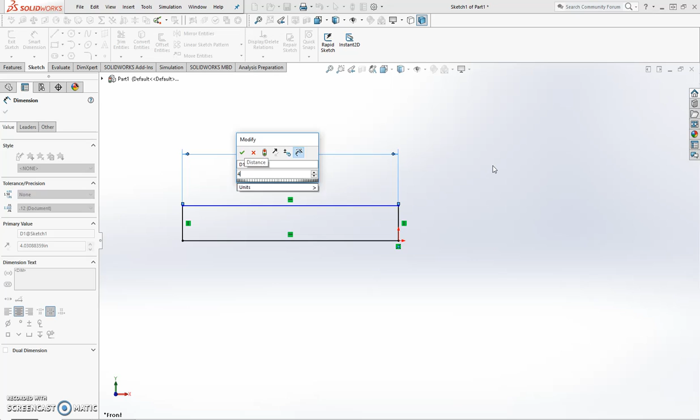Smart Dimension tool is our favorite tool to make sure everything is accurate. I'm going to Smart Dimension the width of mine to be 4 inches, and I'm going to have it only about a quarter inch tall. Very tiny. Now this is still, like I said, a tutorial, so even though this might not be an accurate hinge for something like a door...

It may be something to work on more of an airplane or something that is very large in construction.

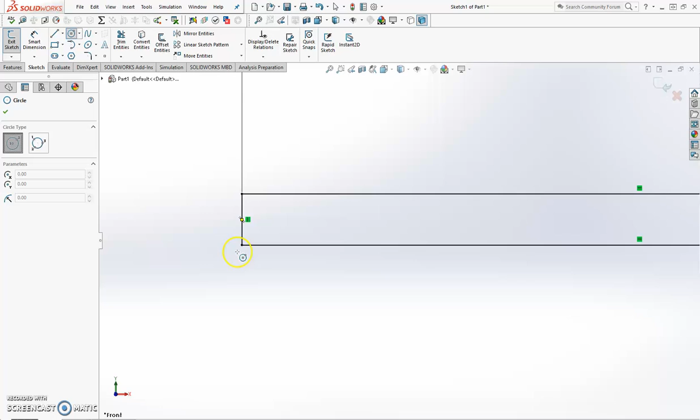Now what we need here is the rings that our hinges are going to be able to swivel on. So I want to take my circle tool to one of these intersections, and I'm going to zoom in to make it very easy to see here, and I'm going to click and bring that all the way up. Now because we know the distance of the thickness of our hinge is going to be a quarter inch, we know the radius of this is going to be a quarter inch, and the diameter will be half an inch. That's good information to know when we cut this out down the road.

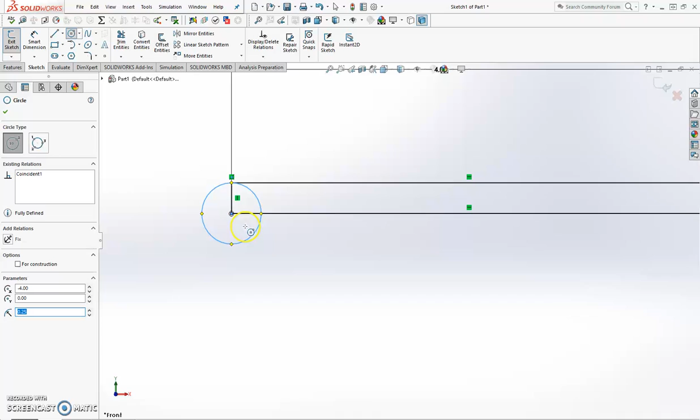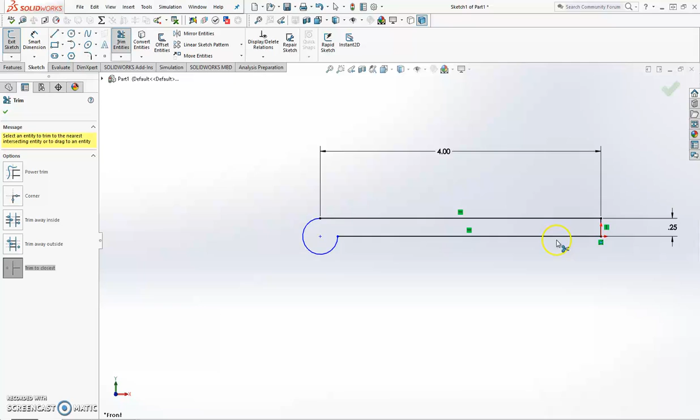Now we want this to be all one giant shape, so I'm going to go ahead and grab my trim tool. I'm going to trim to the closest - 99% of the time you'll find this being used. I'm going to trim out the parts I don't need, leaving this nice single long surface to use. I'm done with my trim tool, so I'll green check mark it.

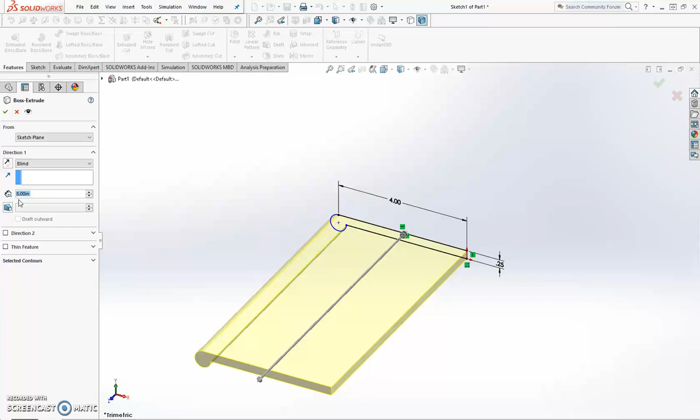Then I'm going to go ahead and extrude this and give it 3 dimensions. So I'm going to go into Features and do an Extrude Boss Base. We can pull the arrow as far as we need to give it the right distance, or we can come over here and type in the distance we want. For this demonstration, I'm going to make mine 8 inches long, and then I'm going to green check mark. Now we have a nice, beautiful hinge that has all the things we need for it for now.

We need a pin to eventually go through this, so we might as well make our cut through it right now. We will do an extrude cut on the surface.

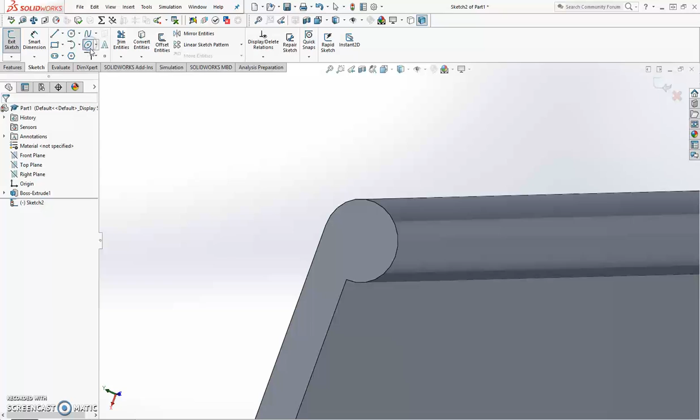I'm going to grab my circle tool, and then I'm going to create a circle here. Now it can be very difficult to find the center, and a lot of students will find this very difficult to figure out where to put your circle. But if you take your cursor and kind of hug it along this edge, you'll get these yellow points showing very certain sections of the circle. More importantly, you get this black dot in the center of the circle show up, and this is the center of it. So I'm going to make my circle from that point.

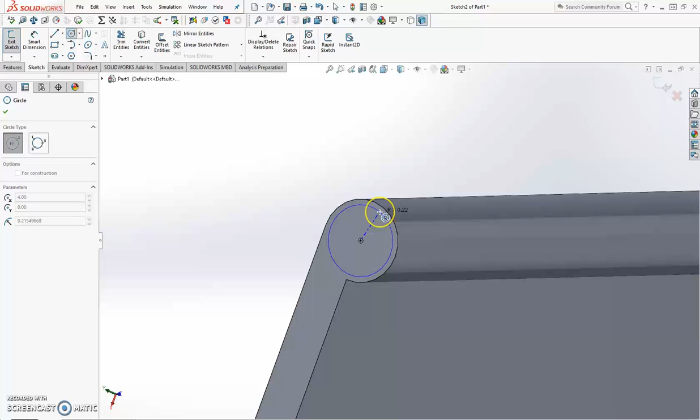Now looking back, the diameter of this should be - the radius is 0.25, and the diameter is 0.5. So I'm going to make my circle here just short of that, so I have just a little bit of room to work with. I think I'm going to Smart Dimension it out to be exactly 0.4.

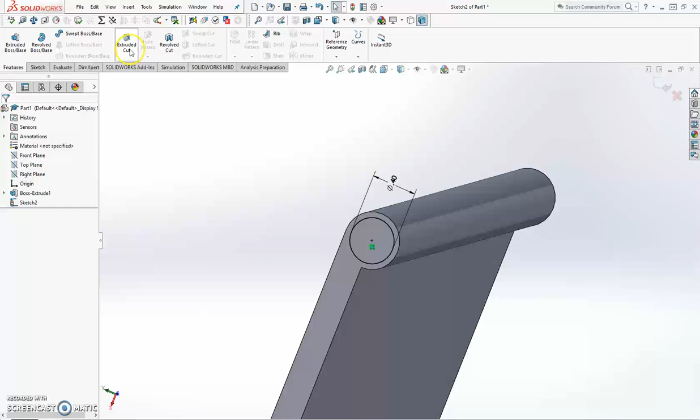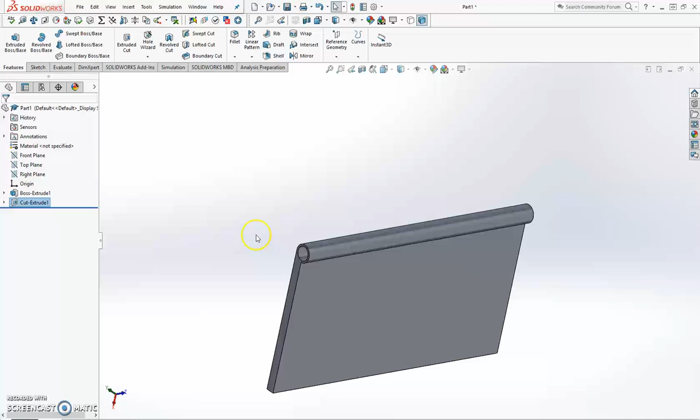When I have that exact 0.4, I'm ready to cut this through, all the way through. So I'll grab my features, extrude cut this time, and pull this all the way through. The length of my hinge was 8, so I'll make this number 8. This circle can be pulled all the way out, and it can go very far, and you can be excessive with it if you want. It doesn't matter because it is an extrude cut. I'll check mark that, and now I'll have a nice opening here.

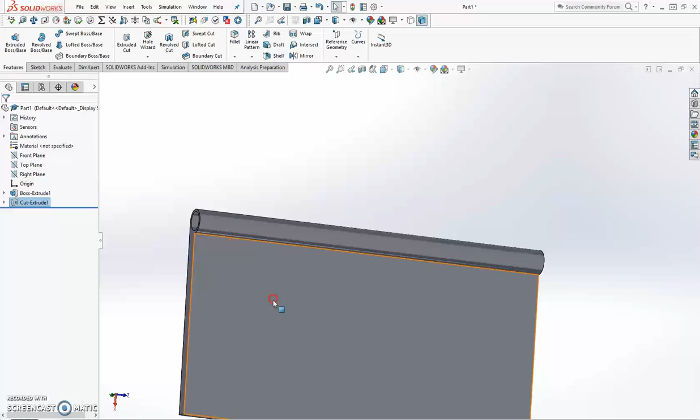Now, a hinge needs to have several different sections cut out of this top area. This is used so that we can have multiple sections hook up to each other. We are going to cut these out by making an extrude cut using one of the planes from the front side, so I'm going to go ahead and create a sketch on this front surface.

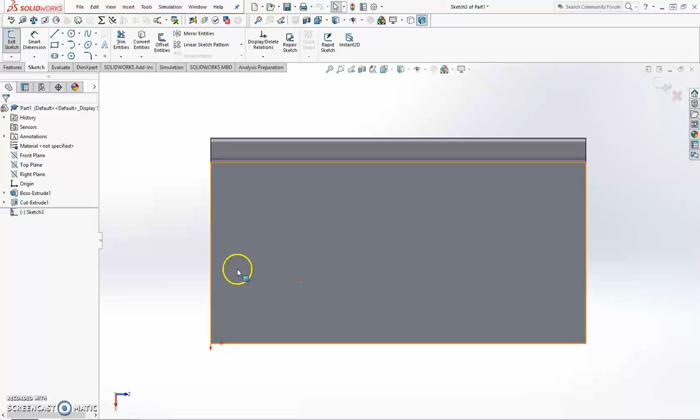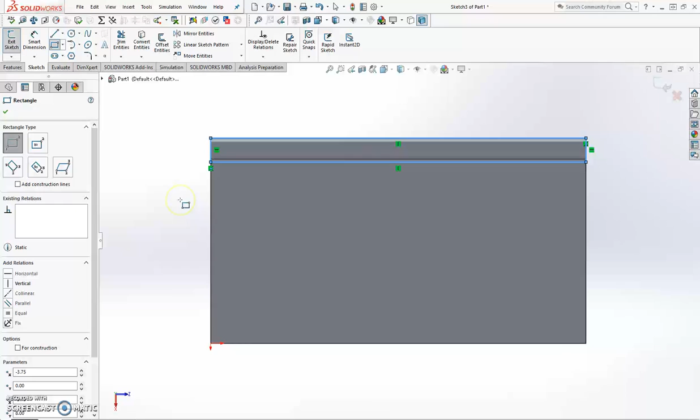I might even press spacebar so I can get my orbiting dice and look at this plane specifically, the side with the curve facing forward towards me. What I want to do is take either my rectangle tool or a line tool, and create this rectangle that pretty much goes the distance of our circle. If I smart dimension this out, it's going to be the same size as my original, the same thickness I made the circle, as well as the length of my actual hinge. Now, if I look at this from the side, we are going right down the middle, right through my actual circle, because I built it on this plane.

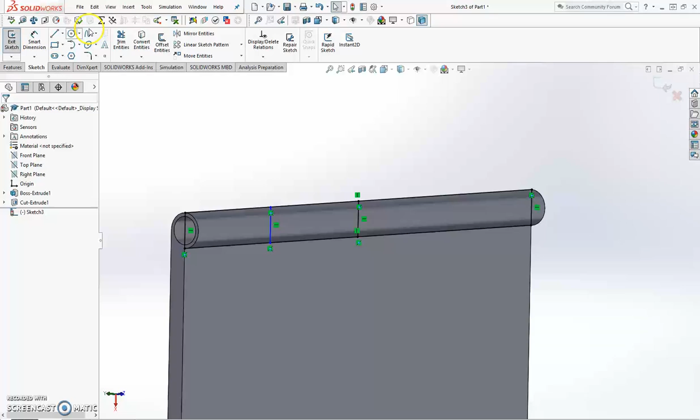Now what I need to do is cut this into equal sections. So I'll take my line tool, and first divide it perfectly in half. I'm going to make a few more divisions, and have 4 sections of this.

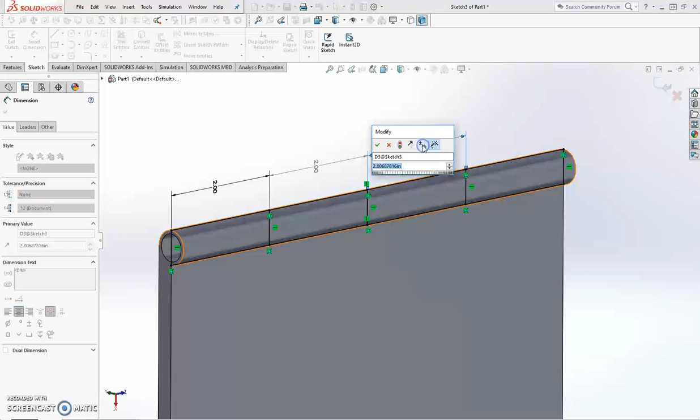Now what I need to definitely do is start to dimension this out so they're all equal. I know my distance is a whopping 8 inches long, so we're going to make the distance between these vertical lines about 2 inches. If I click this line, instead of smart dimension out its thickness, I'll take my cursor and click its neighbor, and what they'll do is make a smart dimension between those 2 sections. I keep that pattern going, force it to be 2, and 1 more, and everything goes yellow because SolidWorks is telling us, hey, I know that was already supposed to be 2. So you just gotta say, okay, you're right, SolidWorks, you're so smart.

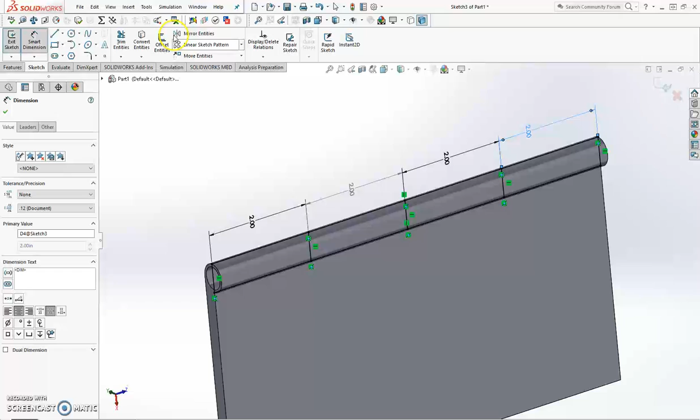Now we have 4 divided off sections, and what we gotta do is delete 2 of them, and skip over 1. So we're going to go ahead and trim out the parts we don't need, or we can go straight to the extrude cut. I think I'm going to go straight to the extrude cut.

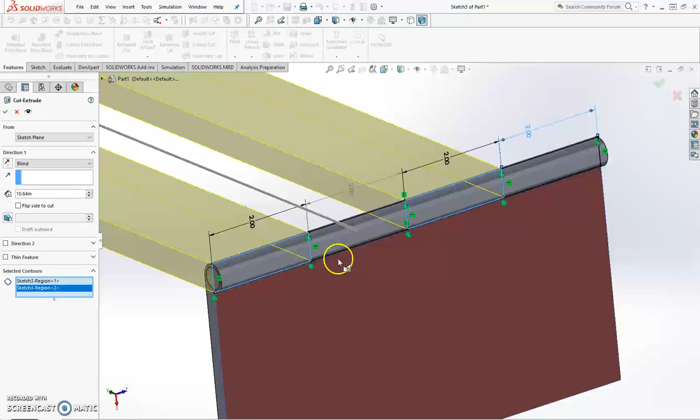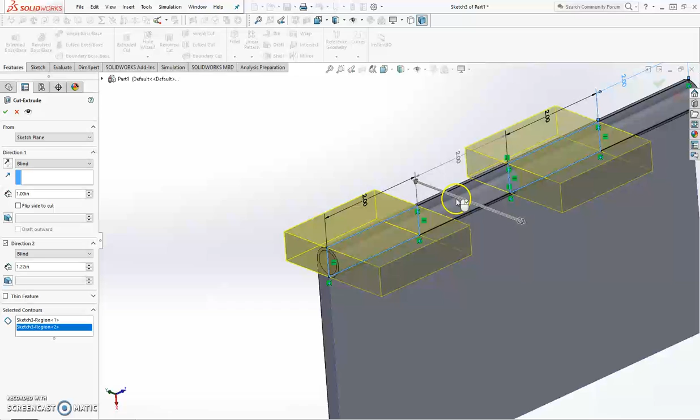Extrude cut, and it's going to ask me which ones I want to extrude cut. So I'm going to tell it I want to extrude cut this first one, as well as the third one, and I'm just going to ignore the second and fourth one. Right now it's only extrude cutting on half of it, so I'm going to take my direction 2 and force it to go the other way. Now these are being cut way too far, so I can pull these in, just so I can easily see what my preview for extrude cuts are going to be. These parts are going to be taken out, leaving behind the second and fourth one. So I'll check mark that I'm done with the extrude cuts, and then those get trimmed out.

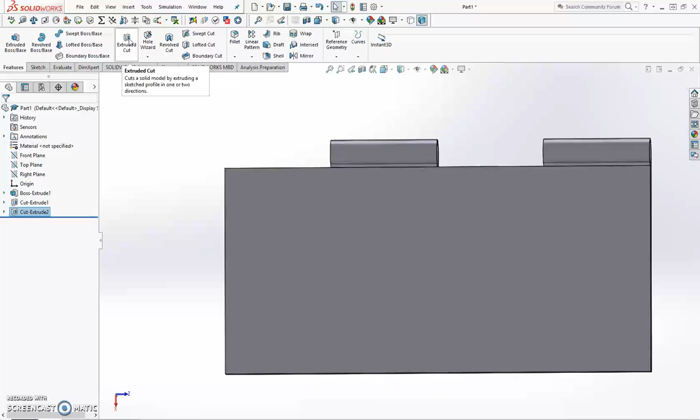Next, what we need is a couple holes that are going to be able to attach this hinge to whatever I'm going to be using it for. We're going to use a combination of extrude cut as well as chamfer. The easy way you could choose to do is Hole Wizard, which pretty much combines those 2 features. But because this is a tutorial video, I think we're just going to do it the slow way, just to make you understand how it works.

So we'll do an extrude cut on the surface, and we are going to need a couple circles to work with. After I make these different circles, I'm going to take my Smart Dimension tool to give them a very specific thickness. For this demonstration, I'm going to do, not 5, I'm going to do 0.5 half-inch circles. I could have probably done 1/4 inch as well, but I'm just going to stick to very easy numbers to remember.

So I'm just smart dimensioning out all these circles. In addition to the thickness and diameter of the circle, we need their placement as well. This is similar to how we did those multiple sections on the top here. I'm going to click the center of the circle, and I'm going to click this edge, and it's going to smart dimension out the distance between those 2. I'm going to make that distance exactly 1.

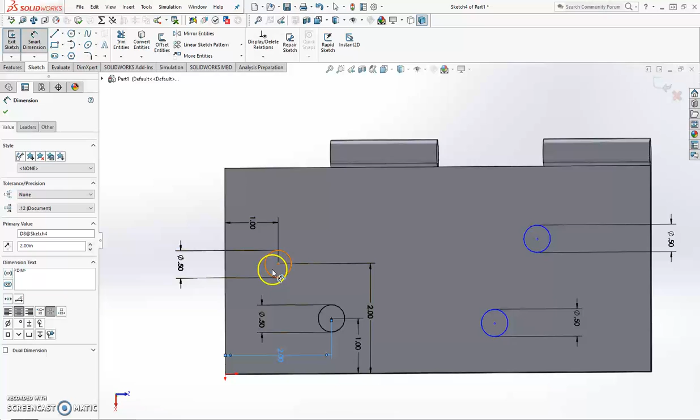I want to do the same thing for its base. So from the center to the bottom, and that one is going to be 2. I'm going to repeat that pattern for my other 3 as well. So bottom to the center of that circle will be 1, and the center of that circle to the edge is going to be 2. We just kind of have this diagonal pattern that's going to look really clean in the end.

I'm going to keep this pattern going. Oops, this one needed to be 1, so I'll double click on that and I'll make it 1 instead. This guy needs to be 2 away, and 1 from the bottom.

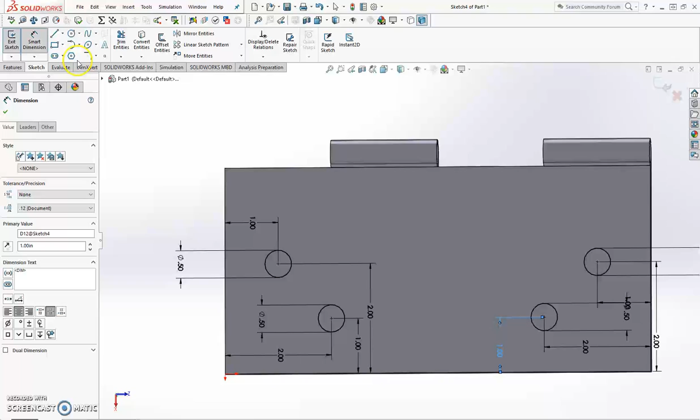I love the Smart Dimension tool. It is your best friend a majority of the time, and it is just cleaning up and making these circles be exactly where I want them to be and exactly the right size. Now that I'm done with them, I'll go ahead and exit the sketch.

And it remembers that I wanted to do an extrude cut. If it didn't, I could just go into features and make sure I grab extrude cut. We're going to go ahead and cut these through and check mark that we're done with them.

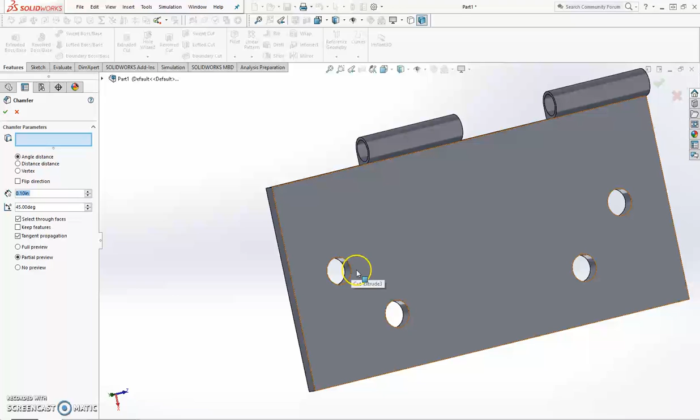Now, leaving the circles as they are is not the end of the world, but I'm a big fan of putting a chamfer in there. Therefore, when you put screws into these, they can be flush with the object you're making. The side you put them on could be either side, depending on the nature of your hinge, but I'm going to put them on this front side.

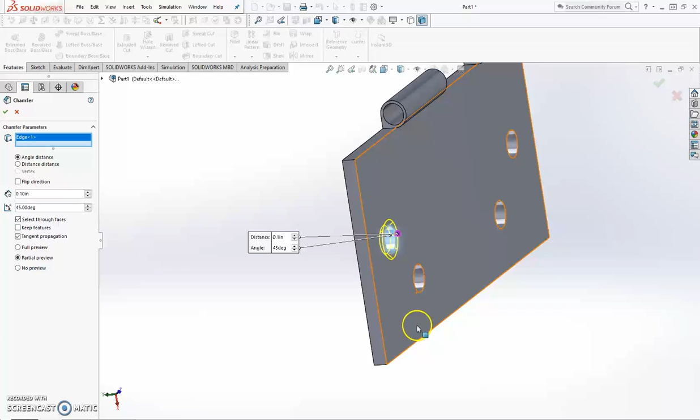Just because we've been staring at it for the last 5 minutes, go ahead and put chamfer on this edge, this edge, this edge, and this edge. And now just check mark that I'm done with my 4 chamfers. Now we've created a single hinge to work with.

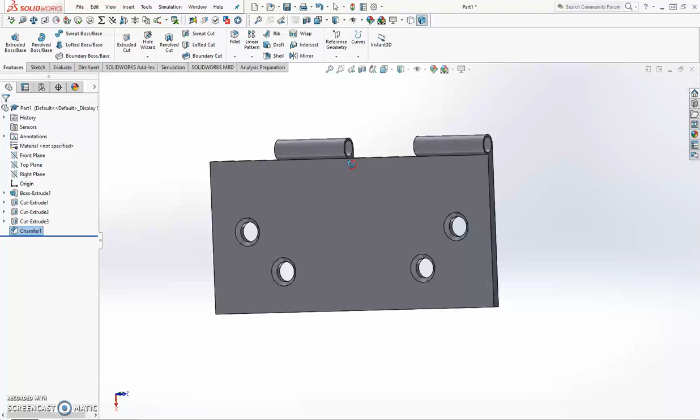In part 2, in episode 2 of this hinge video, we will create a duplicate of this, as well as start to make the assembly, as well as the pin that's going to be able to slide through the top of our hinge.